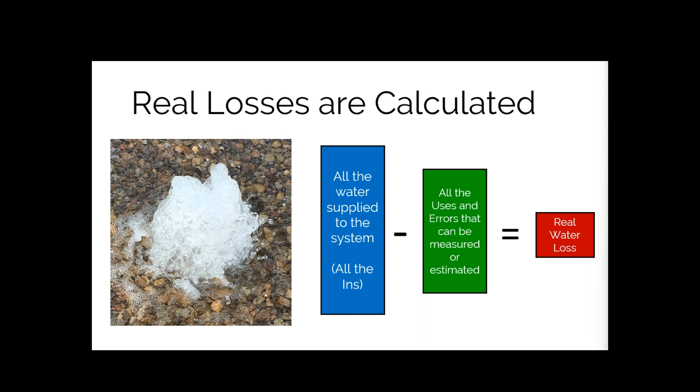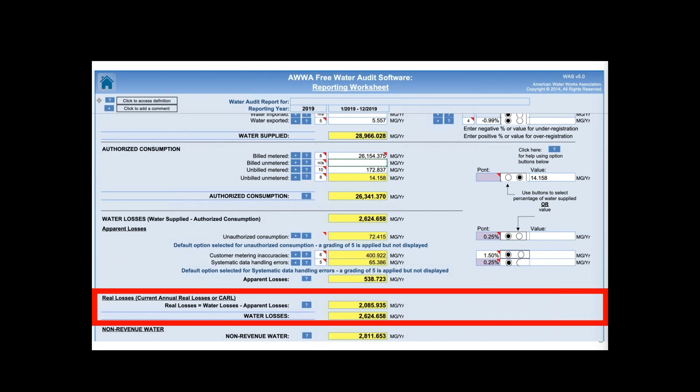When you're in the audit software itself, the real losses are calculated at the bottom of the reporting worksheet. Let's take a look at what the water audit does tell you about real loss. If we go back and look at that water balance again, the real loss is the outcome of that whole balance. It's that calculation based on your inputs for all of those other boxes.

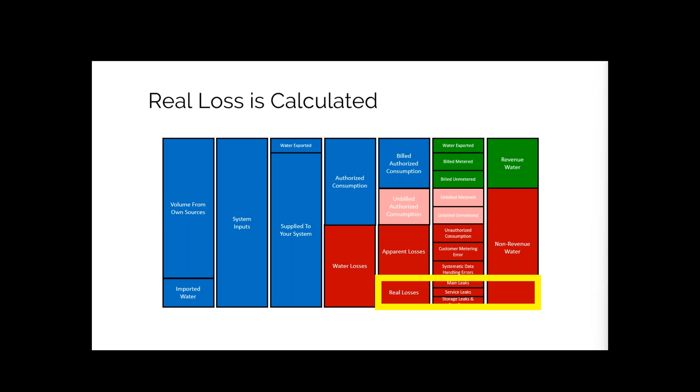Since that value is calculated, you don't enter a validity score for real loss, but every other input does affect the validity of this number. So how does that actually affect it? Let's take a look. If any of your inputs isn't perfectly accurate, the errors are going to show up in the real loss numbers.

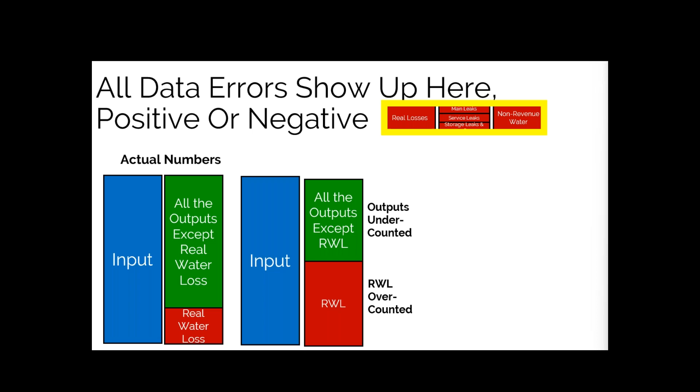For example, if you undercounted your inputs, your volume from own sources or water imported, then your real losses will be undercounted. On the other hand, if you overcounted your inputs, your real losses will also be overcounted. Then if your outputs, like authorized consumption and apparent losses, are undercounted, your real losses will be overcounted. Or if those outputs are overcounted, your real losses will be undercounted.

If you have errors in your inputs and your outputs, your real loss is going to reflect those errors, and it could be going up with one error and down with another error.

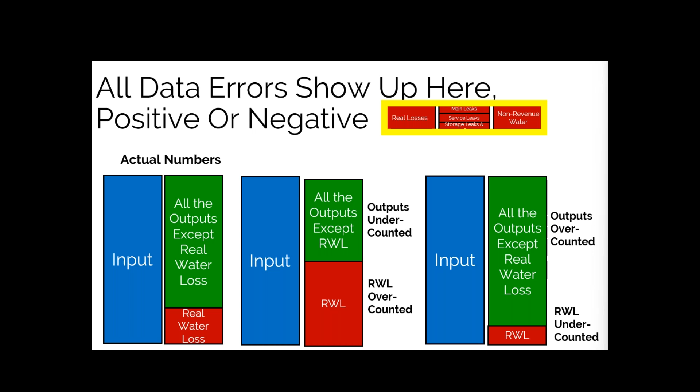So the number reported in the audit is only as valid as the data that you enter. This is why you should look at your data and assess its validity so you understand what the right next steps are for your system. The Southwest EFC is also happy to help assess your data validity and make recommendations on how you can improve it over time. When you complete your audit, you can take a look at your water balance within the software.

You'll note that the water balance states that the real losses are not broken down beyond the real loss volume, so you have to decide what you're going to do with that number. If you're using default values for apparent losses, that means your real losses are based on some assumptions for apparent loss. This free audit software wasn't meant to give you extremely specific numbers.

It is one tool that you can use in the toolbox, but you have other tools in the toolbox that you can also use. We're going to look at the breakdown of real losses and what those other tools are as we go on today.

We also wanted to point out, as you might recall from the last webinar when we discussed apparent losses, that real losses are valued at the variable production cost, while apparent losses are valued at the customer retail cost, unless you choose to select to value your real losses at the customer retail cost. So when the two are valued differently, there can be real differences between the volumes of losses and their corresponding values.

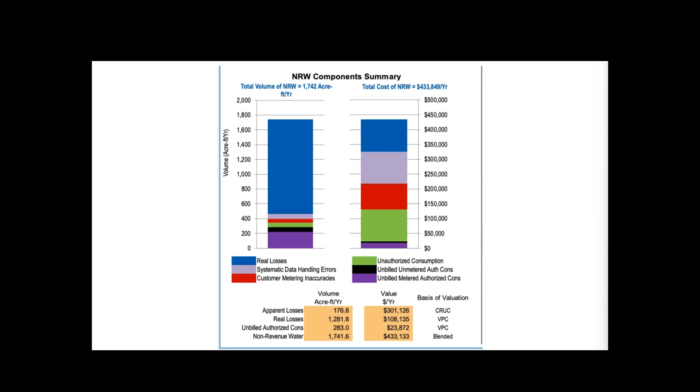And of course, in version 6, they put the comparison side by side. So you can see here in version 6, the real loss volume is on the left, and the corresponding real loss value is on the right. You can see that the difference in the valuations can be significant.

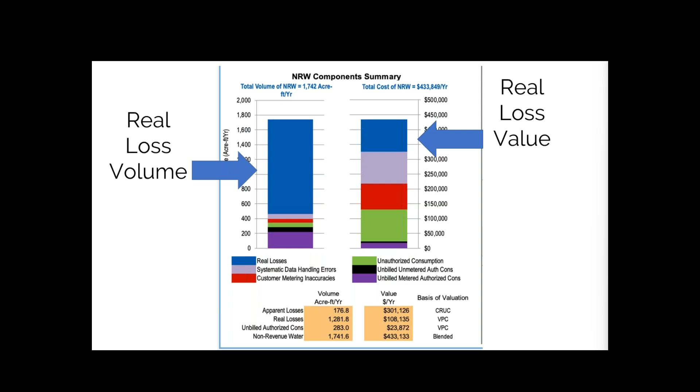So for example, in this particular example here, the theft volume on the left is part of your apparent loss component, and it's almost insignificant here when compared to the volume of real loss. But because it's valued differently, at the retail cost, it has a relatively small volume, but the value is almost equal to the real losses in this system. We really want you to think about not just the volumes, but the values, the dollar amounts associated with them.

And how are you valuing those? Are you selecting to value real loss at customer retail prices? Or are you selecting to keep them at the variable production costs? There are reasons for both, and we would like to have a conversation with you if you're not sure how you should value them, and maybe talk about which audience you're presenting them to.

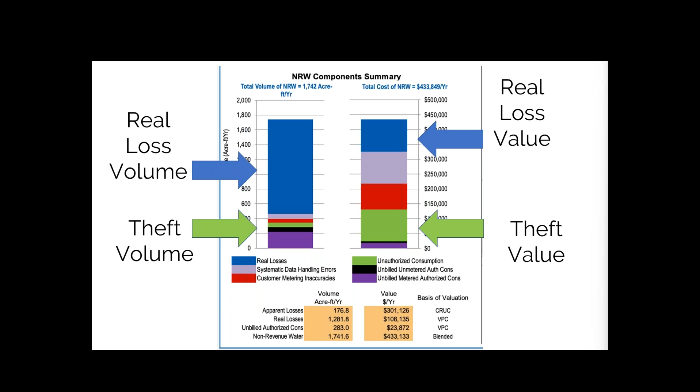So there are different times when it might be appropriate to use the different values. If you've got questions about that and would like to talk to us about it, we'd love to talk to you about it. It's a good question, and it's a good thing to ponder and to think about who you're sharing the information with and how you should be using it.

So we've mentioned that real losses are those leaks in your system. Let's talk about those a bit more in depth now. The first category of real loss is breaks on your mains and transmission lines.

Some number of main breaks are basically unavoidable. The catastrophic main breaks are often the most spectacular sources of loss, and often have the biggest impact on your customers because of the significant effort required for repair and the fact that you're often dealing with large quantities of water.

But not everything surfaces. We do have small main leaks, and they can be particularly difficult to find and deal with, if you have a low density system, or if your sources are far away, or soil conditions prevent those leaks from surfacing. Hydrant leaks and valve leaks are also going to generally fall into this category, even though they're really appurtenances, not the mains themselves.

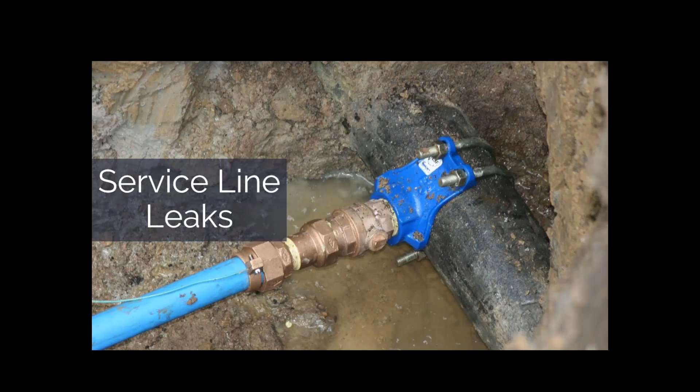And then finally, the service line leaks. These are often less obvious, but it's important to remember that any leak on your side of the meter is going to accrue to the utility as a loss, as a real loss.

The leaks after the meter could potentially accrue to your utility if you have a leak or repair rebate program in place. If your utility credits customers for leaks on the other side of the meter after a repair is made, completing the monetary credit transforms that water from revenue water to non-revenue water, and pushes that volume into the real loss column. So just be aware, if you have a program that helps your customers, it does impact your water audit and how you're tracking those things.

And then, of course, there are leaks at tanks and overflows at tanks. The overflows might be very obvious, assuming they're happening when someone's there and can see them. But there are times when they might not be.

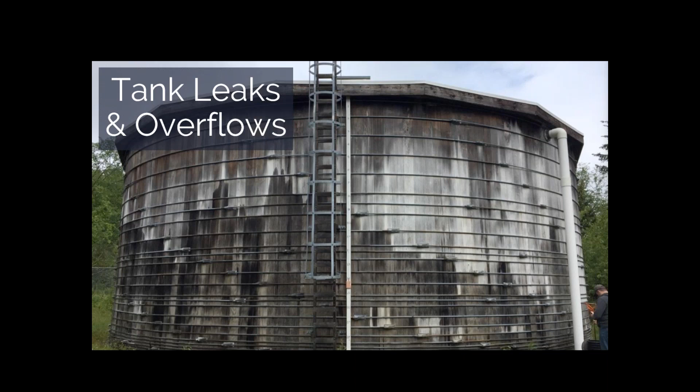This is a water tank in Alaska, and they can no longer fill it to its 19-foot capacity, because if they go over 16 feet, the system hydraulics cause an overflow at a tank about a mile away. It's completely out of sight when you're at this tank, but it's at a slightly lower elevation. So if they fill this tank up, the water flows out the top of the other tank a mile away. If they weren't aware of that, if they didn't understand their hydraulics, and were standing here looking at this tank, there would be nothing going on. They'd be filling it up and wondering why they could never keep it full. So just something to be aware of.

So what we are getting at here is we want you to think about your infrastructure, think about your tanks. Some tanks are built to channel leakage so that it can be recognized, quantified and addressed, and others aren't. Your ability to determine whether tanks are leaking, and how much, is going to be dependent on your infrastructure and the level of effort and what kind of instrumentation you have. If the leak is visible, or if it's soaking into the ground very quickly, lots of things can impact your knowledge of what's happening at the tanks.

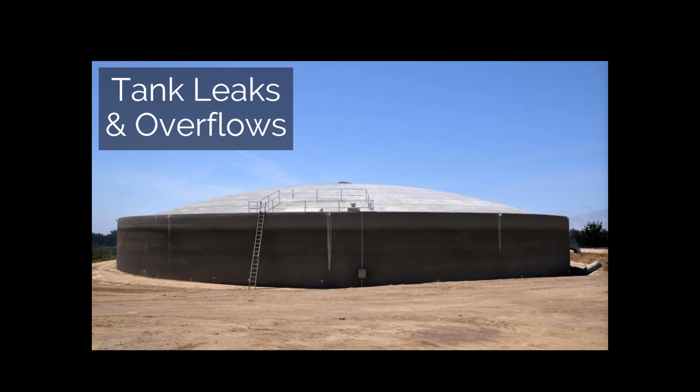You might have real loss in your production and treatment processes as well, if those are inside of your audit boundaries. These losses aren't typically talked about too much because they're usually pretty small compared to other categories. I want to be clear this does not include water that's purposefully used or disposed of as part of the treatment process. Things like well flushing, that's not loss. Neither is brine disposal if you have an RO treatment plant. Those are both purposeful actions. You're doing it for a reason, and those volumes would be considered authorized unbilled use.

But you could have leaks and real loss between the wells and the distribution system. If the audit starts after treatment, these kinds of leaks wouldn't be included. But of course, you want to be aware of them, tracking them, analyzing them, and probably repairing them at some point. It's not one of the major categories, but definitely an opportunity for real loss.

So with that quick review, let's run a poll to see which of the 4 categories I talked about you think typically contributes the biggest component of real water loss—your mains, your service lines, your tanks, or production and treatment losses. I'll give you just a few minutes, and remember, if you want CEUs, make sure you click in.

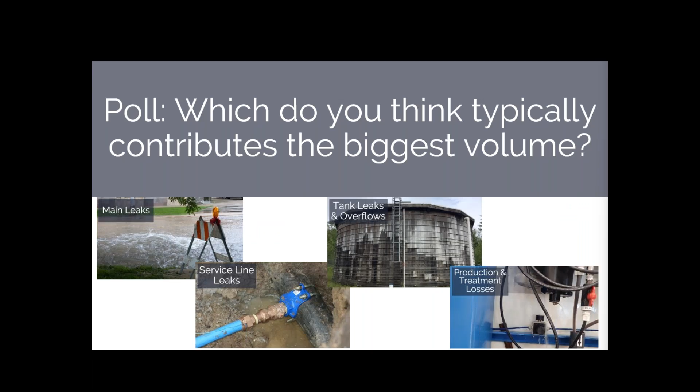All right, so let's get to the correct answer for the question. To some people's surprise, the correct answer is service line leaks. To quote AWWA's M36 manual: in well-run systems, the greatest annual volume of real losses occurs from long-running, small to medium-sized leaks on customer service connections, except at very low densities of service connections. Oddly, these are the leaks that quite often aren't actually tracked closely in many water systems. They're often found and repaired, but poorly documented. This is something to think about when considering your data, the sources of loss, and what you want to track going forward.

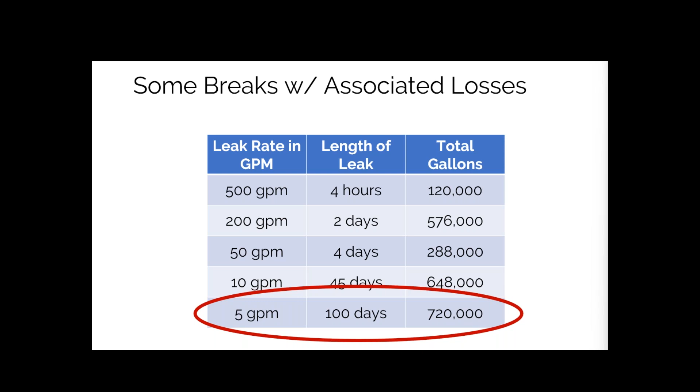Getting back to my earlier point about long-running small leaks, here's a chart of loss volumes based on flow and runtime. One thing this really brings home is that the gushers quite often aren't the problem when it comes to real loss volume. That's because they're big, so they tend to be noticed, located, and repaired quickly. The small, long-running leaks can lose more water than the big ones over time.

There's a lot the audit doesn't tell you about real loss. In fact, it only tells you one thing: the magnitude. And if you don't have the rest of the audit dialed in, it's a little like looking at an iceberg. You've got an idea of how big it is, but you can't really tell for sure without looking under the water. The devil's really in the details.

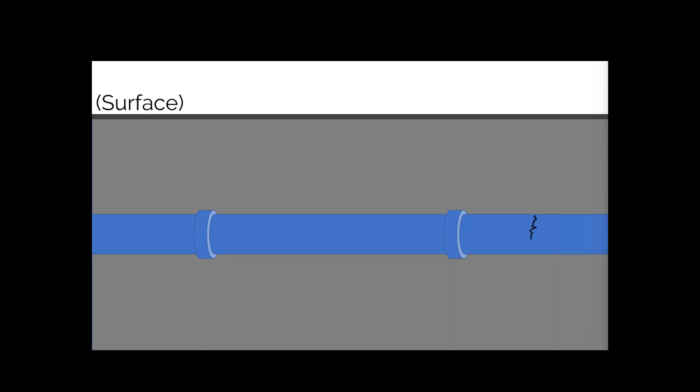Here in particular, we're talking about the types of real loss that typically occur on the mains. If we take a look, there are really 3 basic types of leaks. Many leaks will surface and effectively announce themselves—those are your reported leaks. As a side note, the next question to answer for these types of leaks would be who reported it: the public or utility staff doing rounds. This is a good piece of information to keep track of as well.

Second, we have leaks that don't surface, but are findable through proactive leak detection possibly. These are called unreported or hidden leaks. They're big enough to find if you're looking for them and might over time turn into reported leaks. But they aren't obvious and so may run for longer periods of time without being discovered. And finally, there's what we call weeps and seeps—these are the undetectable or background losses.

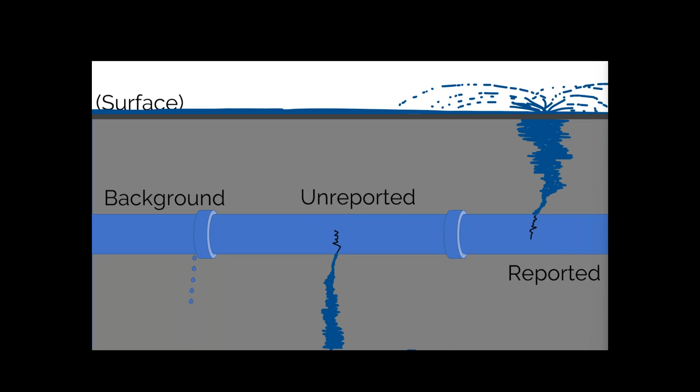They're named this way because they're happening in the background and often can't be found, even if you're actively looking for them using typical leak detection equipment. These are the small leaks, typically at the joints, that are basically unfindable. They're not reported, they're not detected using traditional acoustic equipment. And I did say traditional.

There are new technologies coming out all the time, and it's possible that over time these categories are going to blend together even more. If we're thinking about the satellite technology that's looking for chemical signatures of water or temperature differentials, these things might start to show up with those types of technologies.

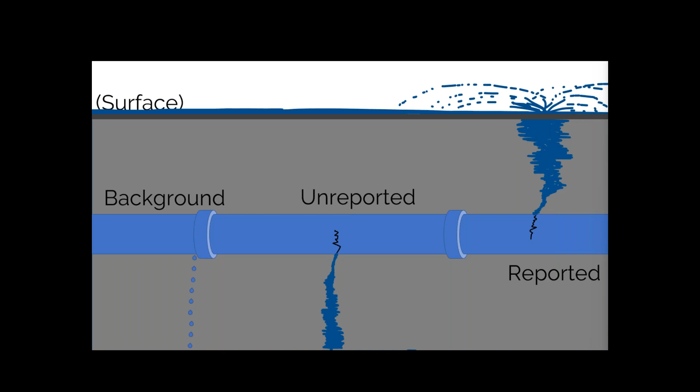This might be because the utility knew there was a leak and they were letting it run as an experiment, or it could be that this was a random search and the events around June tipped them off that there was a leak that they didn't get around to fixing until August.

But this points to a major difficulty with quantifying real loss. And that is that even if you can find the leaks, it's really hard to figure out when a leak started. Further, if you're just starting to analyze your system, you may not know what the actual no leak baseline looks like.

So it's possible that this correlator was randomly placed and no one realized there was an issue until that first spike in June. And only after that repair was it obvious that the pipe had been leaking when the correlator was first placed. So this is the reason for night flow analysis and other methods that we can use.

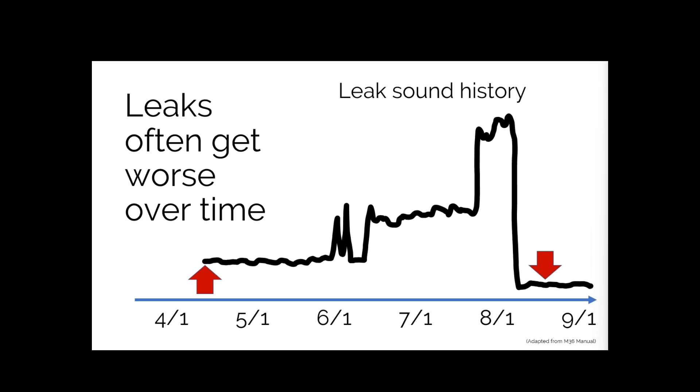So every leak has 3 time periods during its lifespan. The first is awareness, or how long it takes the utility to become aware that there's actually a leak. In the case of catastrophic breaks, that time might be short, but it might not.

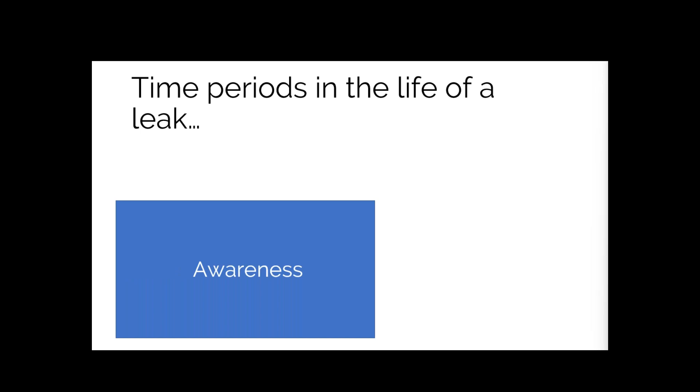Next is location, the time it takes to locate a leak. And finally, there's repair, which is really the time it takes to isolate and terminate the leak once it's been located. For real loss purposes, you don't really care how long the repair takes. You want to know when the leak was isolated and turned off or stopped.

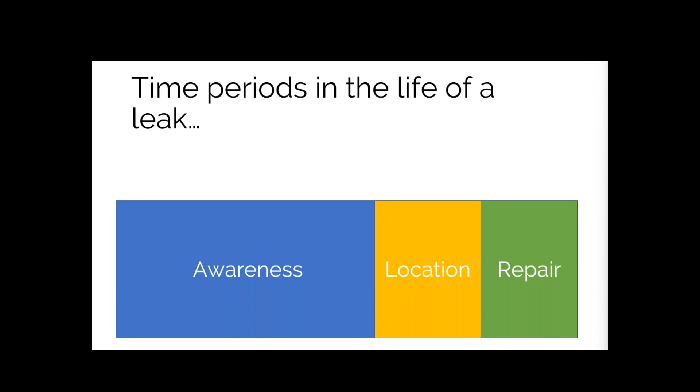How fast you're finding leaks and how fast you're fixing them can have a big impact on your real loss volumes. It's really all about the runtime.

But of course, no matter what you do, you can't stop leaks from happening, and there's going to be a practical limit to real loss intervention. So no matter what, you're going to have some volume of real loss, and it's impossible to recover it all or reduce it all to zero.

Some of that real loss you'll be able to recover, or more appropriately reduce, economically. In other words, you'll get the cost back for recovery or reduction. Some volume you could recover uneconomically. So in other words, you might spend $1 to recover 90 cents of real loss. And although that seems counterintuitive at times, there are reasons why that approach might be taken.

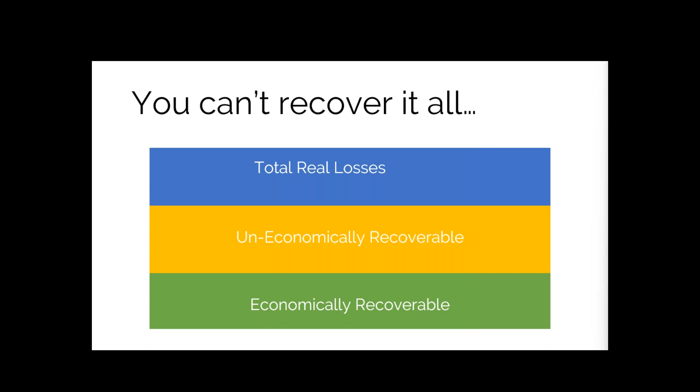For example, if you have a shortfall of supply, or if you're running up against a maximum state loss threshold, you might take some actions that cost you more than they return. And some volume just isn't going to be recoverable at all because nothing is ever perfect.

Pipes are going to break. There are limits to what you can do, but that's okay because you aren't looking for zero loss, which typically is impossible, but instead you're looking for an economically acceptable level of real loss.

There are 4 mechanisms you can use to reduce real loss or keep them economical. These are what I like to call potential areas for action. So these are the activities you can take to start controlling your real loss. And these are pipeline and asset management. So here we're talking about selection, installation, maintenance, renewal, and replacement of your pipes.

Engaging in active leakage control, looking at the speed of your repairs and the quality of your repairs, and pressure management. Using or not using each of these mechanisms will impact your overall real losses.

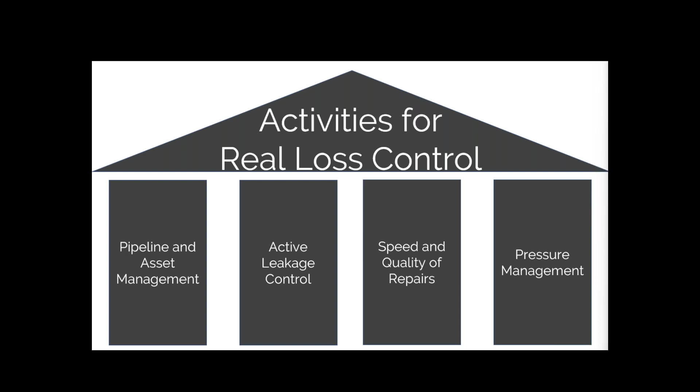But before you start applying these loss reduction techniques and taking action, you have to identify the nature, the quantity, and the cost of your real losses first.

Real loss control isn't free, and in many cases it's not even cheap. So you want to make sure you understand the problem you're having first, and then develop your control strategy. This becomes more important the less accurate your audit input data is.

So for example, if you're using the audit defaults for theft and systematic data handling errors, and maybe your customer meter testing data is incomplete, or you don't have an accurate and complete picture of what's going on with apparent losses, that's going to reflect on the real loss volume the audit calculates.

And this gets back to our opening discussion. The real loss volume the audit calculates is based on all of those other inputs. It's not going to be perfect. What you have is an approximation. How reasonable that approximation is depends entirely on how accurate those other inputs are.

So you don't want to go and take action based on bad data. We don't want you to have bad data and get an incorrect view of what's going on and then apply the wrong loss control tools.

And like apparent losses, you need to tailor the strategy to your system's needs. Real loss control strategies are effective, but they can be labor intensive, they can be expensive, and after a point they can have diminishing returns, particularly if they're misapplied.

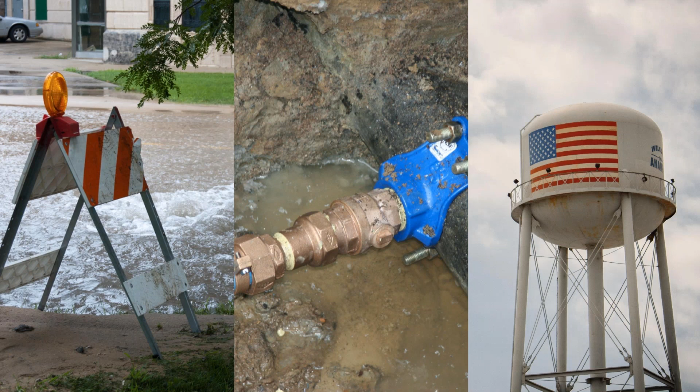As Don mentioned, it's often quite difficult because you don't know when things started, but doing this will give you a better picture. As Don noted, and as we looked at in our poll question earlier, quite often half or more of the real loss comes from service lines. Doing component analysis is the kind of thing that can help you pinpoint that sort of thing.

So if you have data on all three of those categories, or maybe only one or two, you can still start that process and make your real loss picture clear. Because in attempting to do it, it shows you what you know and also what you don't know and aren't tracking. One of the nice things about leakage component analysis is there are guidelines as to what information you should track and what level of detail you should keep on it.

So doing a leakage component analysis, particularly with real loss, serves a couple of related functions. It's corroborating or contradicting your real loss volumes that the audit produces. That in turn gives us insight into the accuracy of the audit, and can help us calibrate it by maybe changing some of those assumptions, as we've said. And it also helps you determine where your real losses are occurring, in general terms, which the audit also doesn't do.

It just gives you that lump sum, because you're doing an analysis of each of those loss areas. And finally, it kind of helps you see what's going on in the background.

As Don indicated, there's three kinds of loss on mains: the reported, the unreported, and the background. Now, the unreported stuff you can find if you're looking for it, but you might not be. So if you can quantify the reported leaks, that gives you a volume that's falling into these other two categories. Basically, it allows you to get more and more granular in your understanding of what's going on.

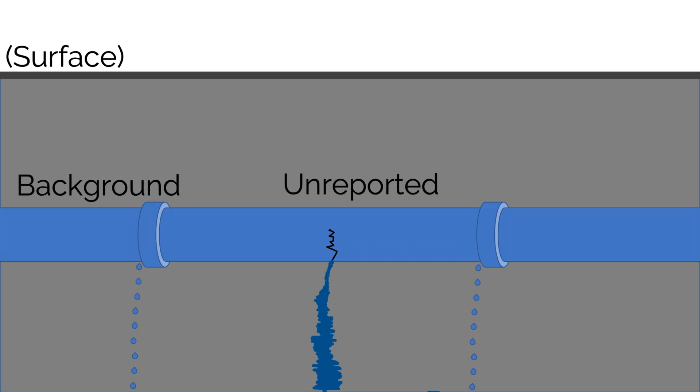As I said, in the context of real loss, we talk about the leakage component analysis. There's actually a tool for this, developed by the Water Research Foundation. It's called Project 4372, and there's a suite of tools, Excel based. Essentially you can take your event data, put it in there, and it will model your losses for you and give you an idea of what's going on in the background, what's likely reported, what's likely unreported.

Trying to do that process is really useful because it shows you really clearly what you aren't tracking. If you have that break and repair time data, you can really start digging into those results and splitting it up into its constituent parts.

It's a fairly complex and data-heavy tool in that you have to have information to put in it, but you can also do some estimating, and it has the ability to model how changing repair times might impact your losses overall, because there's a direct correlation between how long something runs. There's also information in there you can use to estimate volumes based on pipe size and leak size and things like that.

But fundamentally, the biggest eye-opener for people trying this the first time is that it really shows you what you're not tracking and could be.

If you don't have quite that granular data, maybe all you have is a map of your system showing what materials you have and a list of breaks you can identify by material, all is not lost. You can do a more simplified analysis called a break rate index analysis.

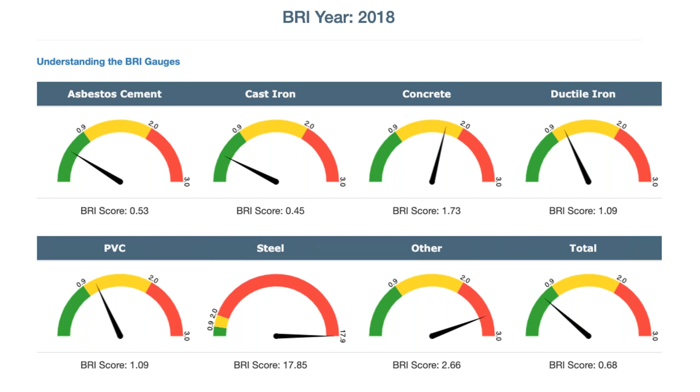All right, about 60% have voted, so we're going to leave it up for about 15 more seconds. Remember to get your answers in. Okay, the poll is closing in 3, 2, 1.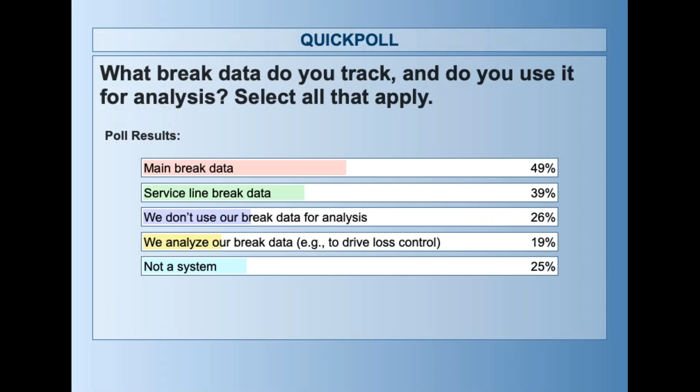So it looks like 49% answered main break data, 39% service line break data, 26% we don't use our break data for analysis, 19% we analyze our break data, and 25% not a system. Okay, that's about typical. That's what we usually see.

For those of you who are tracking main and service line break data and using it for analysis, kudos to you. I think it's really important, not just for water loss control. Honestly, I think that for capital improvement, it's actually much more important because using break data, as I will show you in an example here in a moment, is really useful for figuring out how you're going to repair and replace pipe. For those of you who don't use it for analysis, you might be a really small system and not need to, but I would potentially second guess that question.

A lot of systems kind of don't collect it and use it because they don't have a lot of leaks right now, and that's sort of the justification. I think over time, every system develops more and more leaks, and if you've been collecting information strategically, over time you start to see those patterns develop as opposed to suddenly realizing you have a problem and then not having the information you need to actually address it.

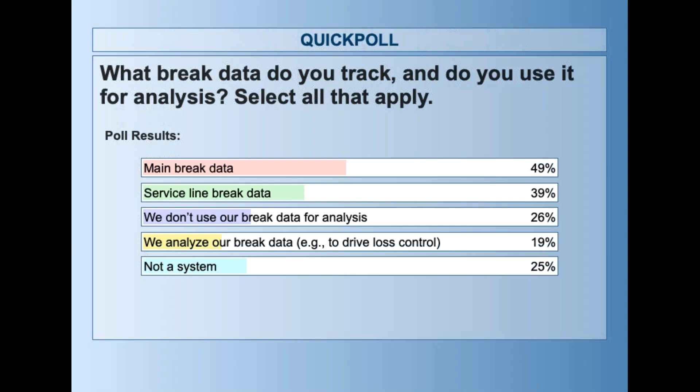So for those of you who aren't collecting it, think about maybe starting it. It's actually a relatively inexpensive and effective way of doing things. Our next session is actually going to be about data collection and mapping, so please tune in and maybe I can convince you to join the data collection side of things.

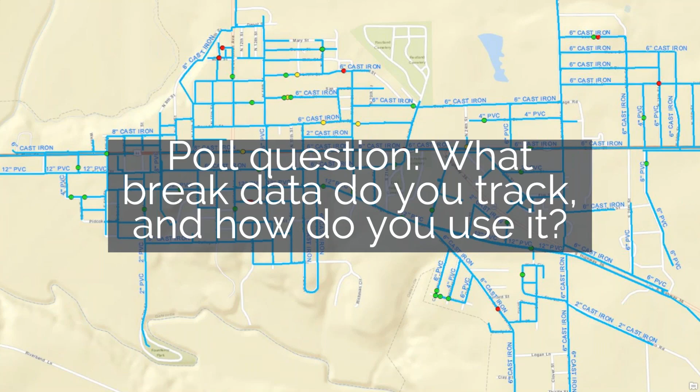All right, so we've talked a little bit about component analysis and those sorts of things. I want to move on to actually doing something about it, reducing real loss and what kind of tools you can apply. We sort of call all of the possible things you can do the loss toolbox, and in this case we're talking about the real loss toolbox.

As Don mentioned, there's sort of 4 different categories or 4 pillars of loss control activities: asset management, active leakage control, repair speed, and pressure management. But obviously within these categories there are a lot of different things you can do, and this is not a comprehensive list. Under asset management, collecting and analyzing break data, hint hint, is one of the things you can do. But main replacement and repair techniques, and service line replacement and tank management fall sort of into this category.

Under the active leakage control, there's different kinds of proactive leakage control that you can do: acoustic surveys, satellite surveys, also night flow analysis, sort of figuring out what that baseline leakage level probably is. Speed and quality of repairs is fairly self-explanatory, whether you could or should improve either the speed or the quality or both of the repairs that you're doing.

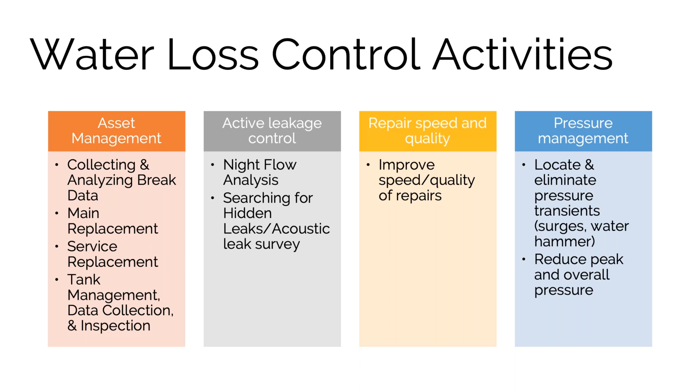And then pressure management kind of falls into two broad categories. There's dealing with overall peak pressure and overall system pressure, and then also locating and eliminating pressure transients. So those surges from water hammer, like when pumps slam on and off, or when valves are open and closed rapidly, being able to track those in your system and reduce them. These and other activities, as we said, sort of fall into this thing we call the real loss toolbox. There's a copy of this along with other tools that you can use for other kinds of loss attached to our applied activity today.

On the left-hand side, we've got the kind of loss it applies to. In the middle, we've got the type of activity. And on the right-hand side, we've got a broad estimate of cost.

Collecting and analyzing break data is a relatively cheap thing to do. Doing a night flow analysis is a little bit more expensive. And of course, replacing mains is a very high cost option. So there's a lot of different tools here.

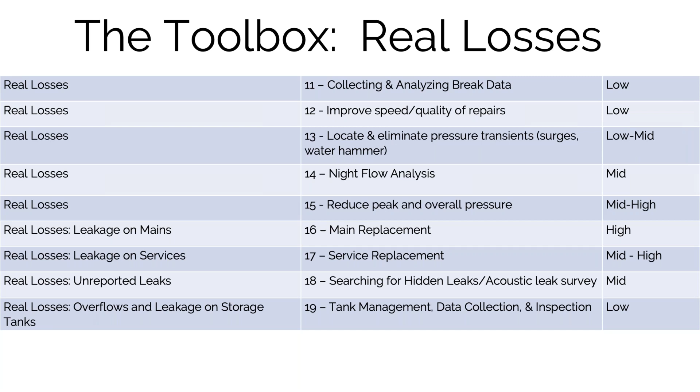I'm going to walk through an example for each of our 4 pillars and show you how these have been applied in real life. I'm going to start with asset management, and I'll do these in a slightly different order since it makes more sense here. Collecting and analyzing break data, then using that to drive main replacement, is really important. This is the asset management tool.

You've probably heard of asset management. It's essentially an overall approach to managing utilities, or any other business for that matter, where you're trying to make data-informed decisions to figure out what to do, how to do it, and how to get the most cost-effective, efficient results for your utility.

We really think of water loss control as a subset of asset management, and water loss control activities can become part of your asset management plan. Many things in your asset management plan will have co-benefits as they relate to water loss control, as we will see with this perfect example here.

Asset management used to be thought of as a big utility thing. We and a lot of other providers have shown again and again that small systems are really well equipped to do this kind of thing themselves as well.

This example also shows you that you don't necessarily have to use the water audit as a starting point for activities that will have positive impacts on water loss control. Although doing the audit is really recommended because that helps you keep track of the efficacy of what you're doing.

So the background for our example here: we've got a system, it's our home system actually. Albuquerque had been spending about $5 million a year for pipe replacement, and they were having no impact on their annual break rates or water loss volumes.

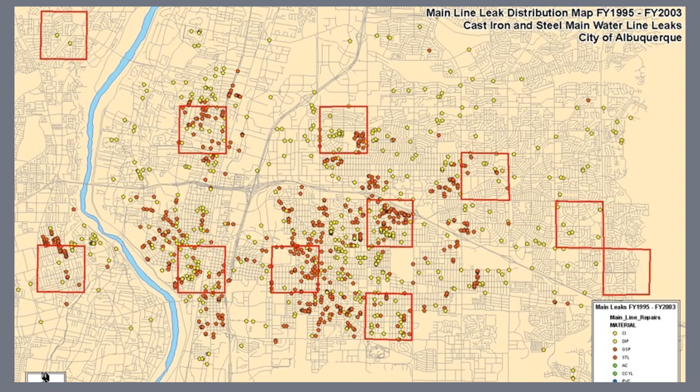Overall in the system, steel only accounts for about 5% of the system, but half of the breaks in this system were occurring on that 5% of the pipe. Now we start to see the issue: steel pipe breaking at 10 times the rate that the cast iron pipe was, even though the cast iron pipe was significantly older.

This is actually the kind of issue that the BRI tool I showed you, the break rate index, was designed to highlight without having to do an in-depth mapping process. This utility was actually the inspiration for that tool.

Knowing that they've got a big problem on a small part of the system, the utility was able to change how they manage pipe replacement by focusing on the steel pipe, and not just steel pipe, but using that break data to figure out what steel pipe was bad and what steel pipe was worse, because even among the sections of steel pipe, there were still some sections that were in serviceable condition.

So they took this information, rethought how they were doing things, and developed an asset management plan that changed the strategy for pipe replacement.

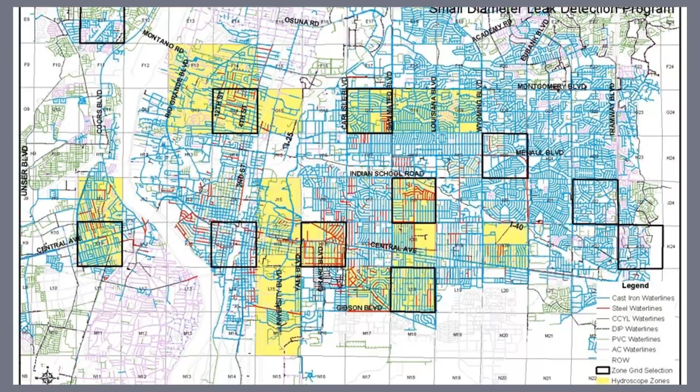Basically, they started doing targeted pipe replacement based on some real data rather than just looking at the oldest pipe in the system and going with that.

They implemented this asset management system around 2011, and within 5 years they'd reduced their break rate and associated costs by 45%, which is pretty dramatic.

They also had a 5-year cost avoidance of about $9 million, and that's $9 million that they were able to spend doing other things, valve replacement programs, other kinds of activities.

And the interesting thing about this process is they did not change the amount of money they were spending on pipe replacement. They're still spending $5 million a year. They actually replaced less pipe in the system because they were doing these targeted approaches. So they had more initial setup and breakdown costs as they were moving around the system, but it was a much more effective way of dealing with the pipe breaks, as the results here clearly show.

I don't have the loss control numbers, but there was a concurrent drop in overall real losses as well that sort of tracked this. So, good example, I think.

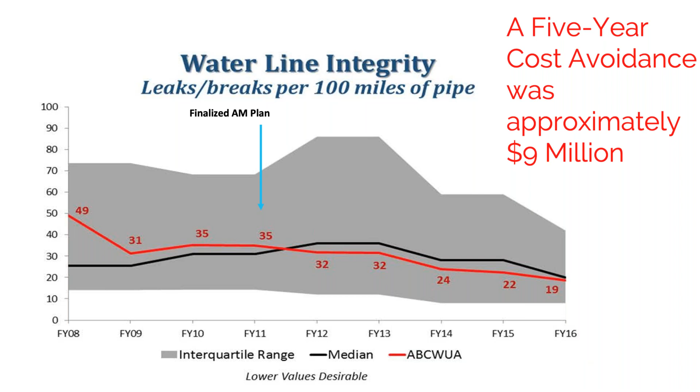Moving on to speed and quality of repairs, it seems pretty obvious. It's pretty straightforward if you track this information, but a surprising number of systems that we work with cannot tell us how much they spend on an average service line or main break, or how long those repairs take, because they just don't track the information because they don't see it as being valuable.

And I'm not talking here about just speeding up your repairs for the sake of speeding it up. You want to do it if it makes sense, when it's evaluated, given the triple bottom line and the costs associated with the water that you're losing.

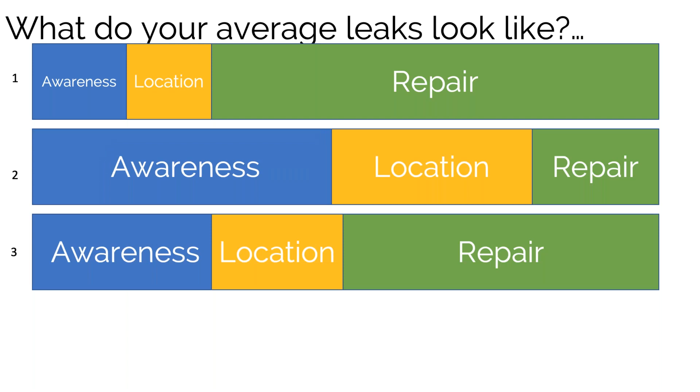So this is kind of a thought exercise. Just think about what the average leak in your system looks like. Are they typically those gushers where you become aware of them quickly, but maybe it takes you longer to repair? Is it maybe something a little more like this, where awareness takes more time? There's a lot of different ways this can play out, and obviously different leaks are going to play out differently.

But knowing what the average in your system is, is really useful, because then you can start to look at what would be the impact of speeding up the repair. If I can cut my repair time in half, what does that save me in terms of losses, et cetera?

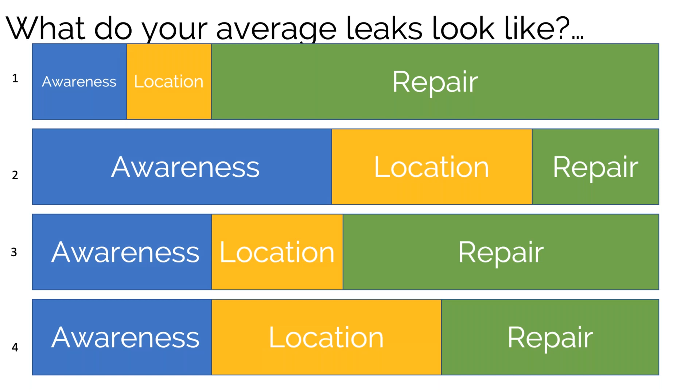You really have to do a cost benefit analysis to see whether there is a case for more rapid response. Some costs you might have are having additional staff on call to be able to deal with stuff at night, maybe additional equipment or resources or spare parts that you don't normally stock.

And then you have to weigh that against the benefits of actually speeding things up. Reduced water loss would be a benefit, and obviously not having to produce the water that you're just pumping out of the hole in the pipe. Maybe reduction in damages from catastrophic failures, letting things run longer so there's more damage. But then there's also social benefits, customer goodwill, and there may be other non-economic benefits.

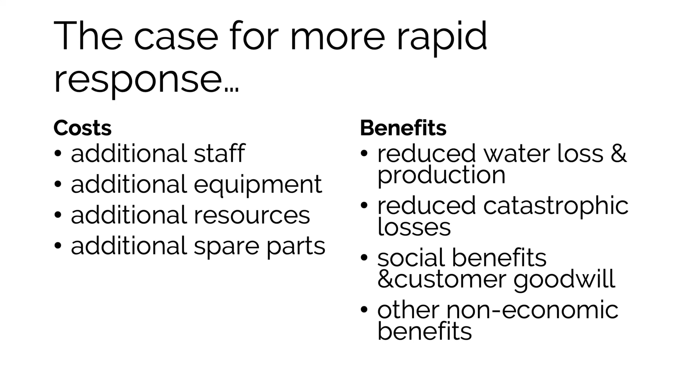So this is really about a cost benefit analysis. And the neat thing about data collection is you can leverage break data along a lot of different lines if you collect the right pieces of info.

This map you're looking at here is from a system we worked with in Texas, and we started out looking at this as an asset management program, but one of the things they tracked was repair speed. So in addition to tracking the location of breaks and the materials breaks were on, we added a time element to this. You notice there's 3 different colors of dots: green, yellow, and red.

Green was repaired within 24 hours, yellow within 48, and red's anything that took longer than that. So 80% of the leaks were repaired within 48 hours, 70% of those within 24 hours. Some of the other breaks, about 18%, took longer than 48 hours.

And then we started noticing there's some correlations in a few places between long repairs and areas that are having repeated breaks. But because we had this information and knew how many people were involved, what the labor costs were, we could start to do that analysis to see whether sticking to the current repair scheme was cost effective, or whether it might be more cost effective to speed it up or slow down.

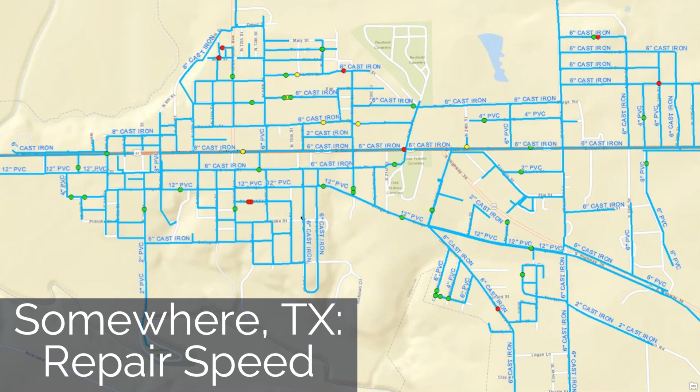So when you're thinking about this aspect of loss control, you really want to think: do you know how fast you're fixing breaks? Can it be improved? If so, how can it be improved? And then finally, the real question is, should it be improved? Because in some cases it's going to make sense, and in others it's not.

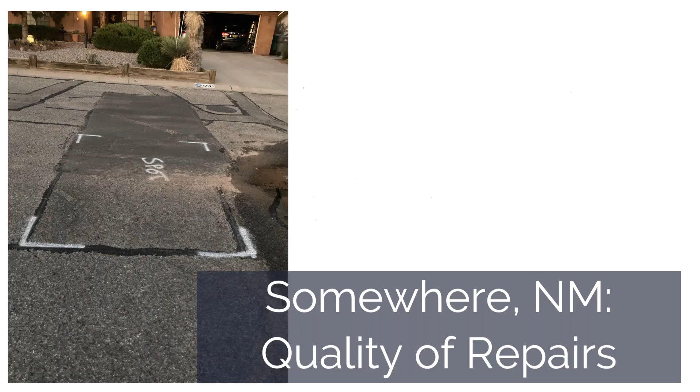But that's only half the picture. That's the speed. Quality is the other side.

This is a leak actually in our director Heather's neighborhood. There have been 5 leaks in the same location over the past 6 to 9 months, and the utility just keeps digging up the street, making a repair and repaving it. And if you look at this picture, you might notice there's a spot right on top of a recently repaired section of pipe, because it's leaking again.

And this has been going on for a long time. We can tell because on the upstream, uphill side of these leaks, it's dry as you'd expect out here in the desert, whereas the downhill side is all lush.

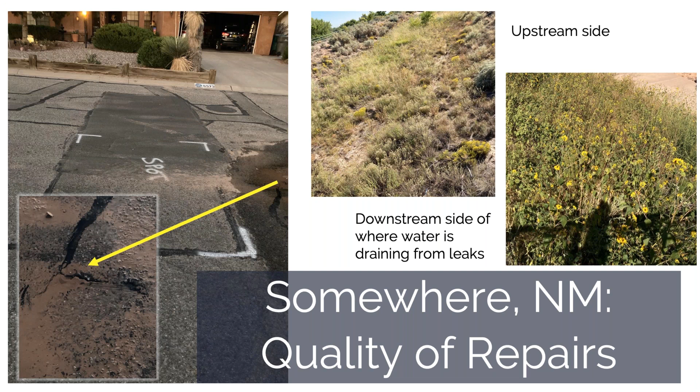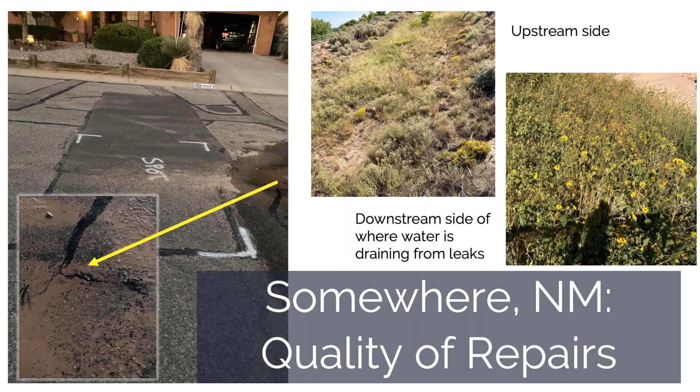So this gets into the repair approach. Is this utility doing the right thing by continually coming back to the same place? If this was an occasional issue, that would be one thing, but this is actually more the norm in this particular town. It took them 7 days to repair this, so maybe there's a speed issue as well.

But here the fundamental question is, was repair actually the right solution? This area is known to have substandard pipe. It's old polybutylene stuff that was installed when these developments were made, and this kind of break pattern happens all over the town.

It might make more sense in their case to replace pipe as soon as they notice a break, because the typical pattern is you have one break, you repair it, and then you're going to have to come back time and time again.

So if you're tracking this kind of information and are aware of it, you can start to do cost benefit analysis. It might cost a little bit more up front to yank a service line out and replace it with something that's actually going to last on that first service call, but by doing that you avoid all those return calls. Again, if you've got the information, you can do the cost benefit analysis and see whether that makes sense. So speed is one piece, quality is another.

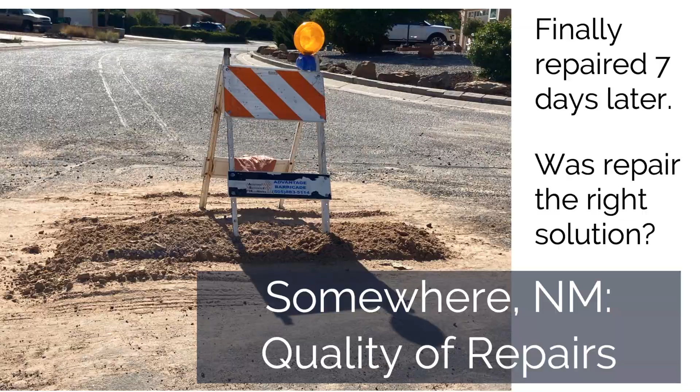Moving on to pressure management. This, like asset management, is one of those tools you can use in the absence of any other information, because we know there's a direct relationship between pressure and leakage.

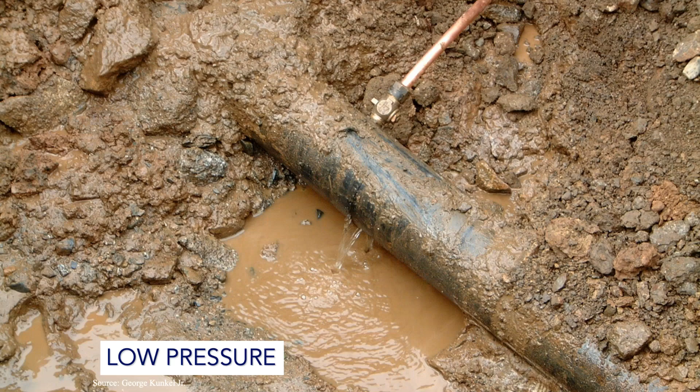If you've got holes in your system, the lower the pressure, the lower the losses will be. The same leak at low pressure might dribble, whereas as you start to jack the pressure up, it starts to gush. This is a pretty linear relationship, and we can use that knowledge to impact losses in our system by thinking about optimizing system pressure.

Version 5 of the audit actually has a KPI where they look at losses per pound of pressure, because in the typical pressures that utilities work in, there's a more or less linear relationship between loss and pressure.

So you can use this kind of information to see what the likely impact is going to be. It's obviously not going to be perfect, but it's good enough for planning purposes.

There's a water loss benefit to reducing pressure, assuming reducing pressure is a viable option for your system. If you're running at 35 PSI, you probably don't have anywhere to go. But if you're a high pressure system, there might be areas within your system where you could reduce the overall system pressure by using a PRV to reduce the pressure and the associated loss.

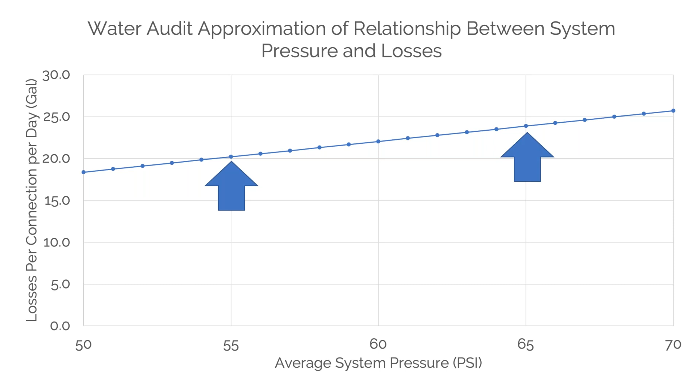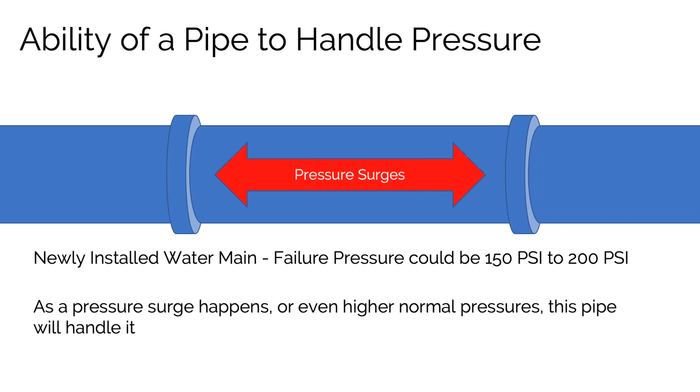But there's another aspect of pressure reduction that is really helpful, and that has to do with finding those transients and getting rid of them. Because when a pipe gets put in, it might have a very, very high failure pressure, you know, 150, 200 PSI, but for every pipe, over time, pressure surges are going to happen. When it's new, the pipe can handle it, it's not a problem.

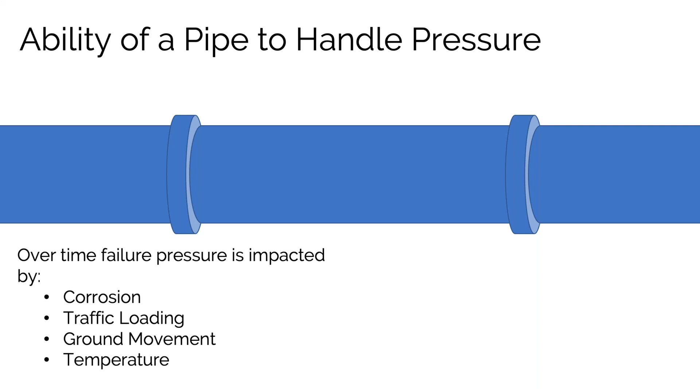Over time, that failure pressure threshold is going to be impacted by things like corrosion if it's metallic pipe, traffic loading, ground movement, or temperature swings. All of these impact your pipe over its life and reduce its ability to handle pressure surges. And if you keep having them, and your pressure threshold is dropping over time, eventually you're going to start to have breaks.

After a couple of decades in the ground, that 150 PSI might be dropped down to 100 or less. So think about not only overall system pressure, but pressure in specific areas, and the ability of your pipe to handle pressure surges.

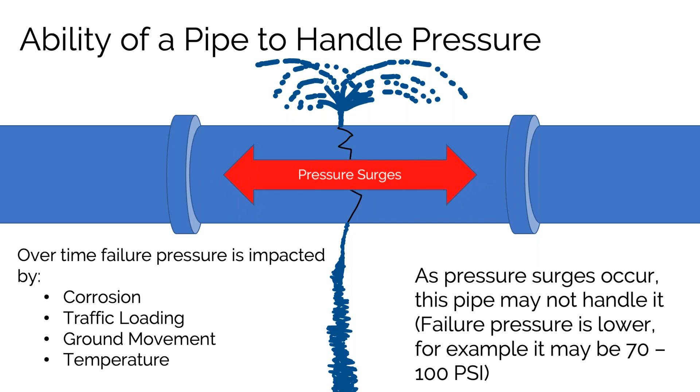This is a piece of break data that often isn't captured - what the pressure is at a particular location where the break happens. Because if you're collecting that information, and you should be able to find it out if you have a hydraulic model, you can start to track and see whether there's a correlation between pressure and breaks. And if it's possible to keep the overall system pressure below that or eliminate those transients, you might be able to reduce the number of breaks in your system.

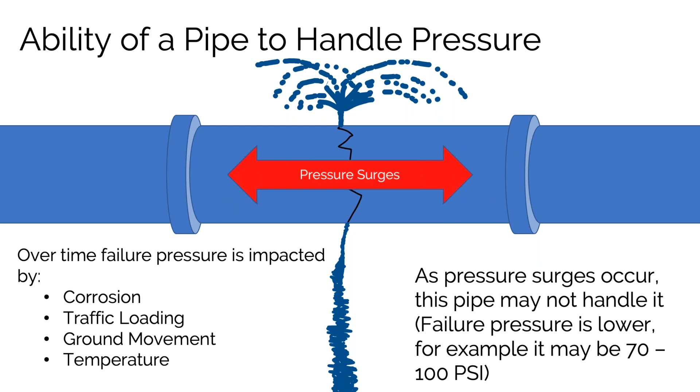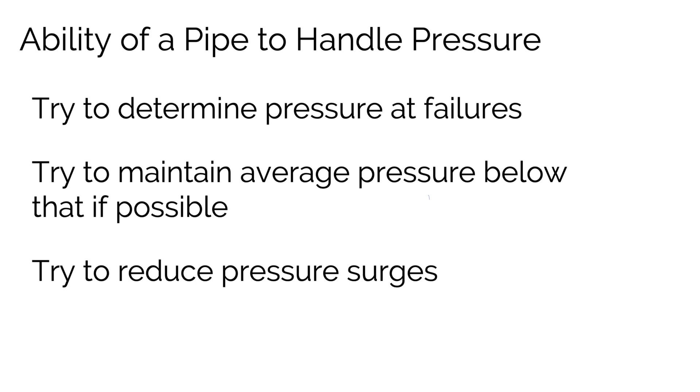So when you're thinking about pressure in your system, think about optimizing it overall, trying to determine pressure at failures, seeing whether it's possible to maintain your system pressure below that threshold. Obviously try to reduce those pressure surges if you can, because if you don't deal with pressure over time, just like everything else, break rates are going to go up.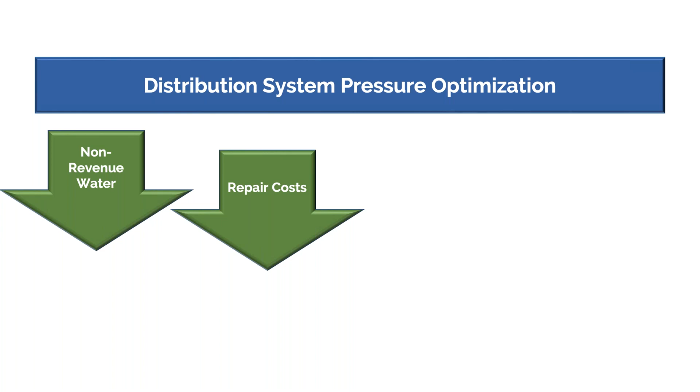And the neat thing about pressure optimization is there's a whole lot of co-benefits that go with it. If you can do this, there's going to be a direct impact on your non-revenue water - it will go down. But if reducing pressure reduces breaks, then you've got lower repair costs. If you're reducing pressure, you're going to lower your energy costs because you're not pumping at as high a pressure. And possibly the biggest benefit is that deferred asset replacement possibility.

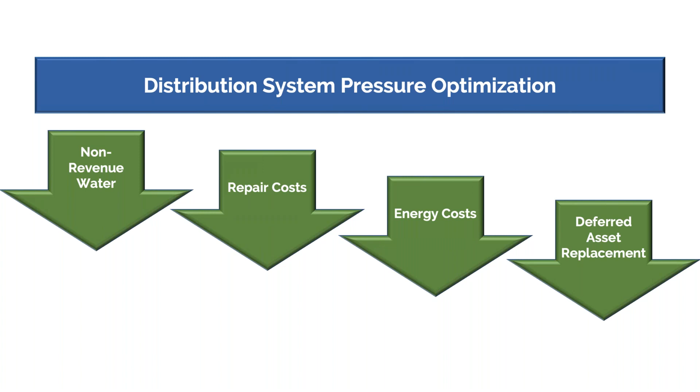If you're babying your pipes, keeping track of what's making them break and dropping your pressure values down below that, you have the potential to help defer asset replacement, and that's money you don't have to lay out. So think about your pressure in your system, think about whether you're optimizing it, because even a small reduction should help. But recognize that in some cases you might not be able to, just because of your particular system.

Last but not least, we're going to look at active leakage control, which is - fine. Yep, just a time check. I think maybe we should just go ahead and move to the wrap up. Okay.

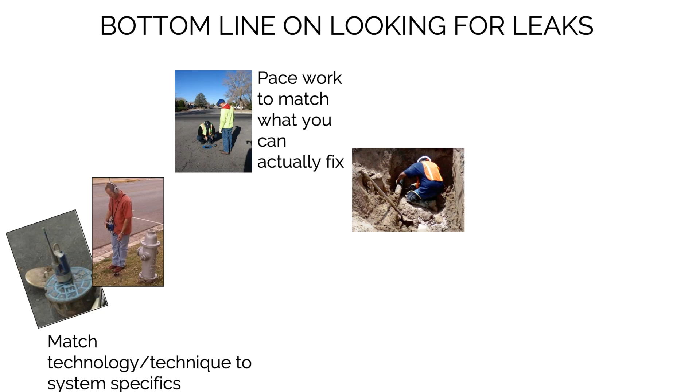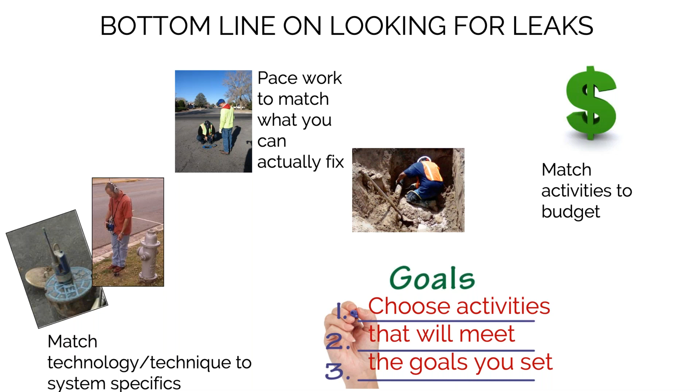So when you're thinking about leaks, just think about a couple of things. It's not so much whether you should do it or could do it, but pace your leak detection to what you can actually fix. Try to match the technology to your system specifics. Make sure that your leak detection practices and goals are aligned, and match what you can do to your budget. Think about whether you're tracking your leak detection efforts, optimizing them as well, and think about whether you can change your strategy to make it more efficient, because leak detecting your entire system every couple of years might be an effective way to do it, but kind of like with our break analysis, doing pinpointed leak detection is often a much more cost-effective approach.

Those tools and information about those and a lot of others are available on our website. We've got a whole water loss control switchboard that you can look at. That's available at our website at SWEFC. And one of the things on there is a template guidance document designed for documenting your auditing process.

And we're going to give you an applied activity that you can download from the chat here. That is essentially a bit of a thought piece - a team exercise on reviewing the real loss volumes and values that your audit gives you, making those initial assessments about whether loss control action is appropriate, and if so, what action you can take and maybe should take. So with that, I will open the floor to questions if we have any, and put up our contact information for anybody that wants to talk about any of these issues in much more depth.

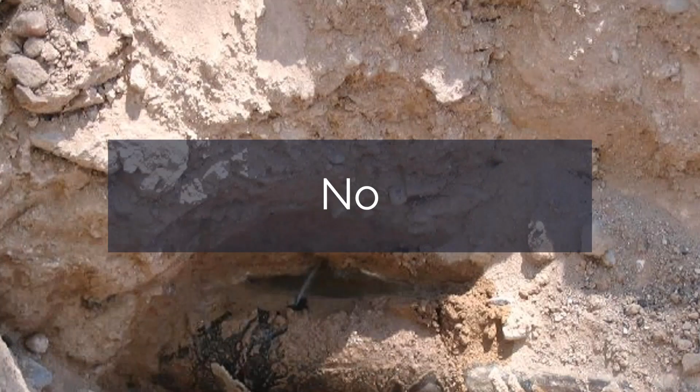We have a question about surveying the entire system every 4 years. I'll go back to that slide and walk through that section. The point is that not every leak is going to surface, and not every leak can necessarily be found. Like this example right here, it's been going on for a very long time and it's bone dry above it—this is a leak that's not going to surface.

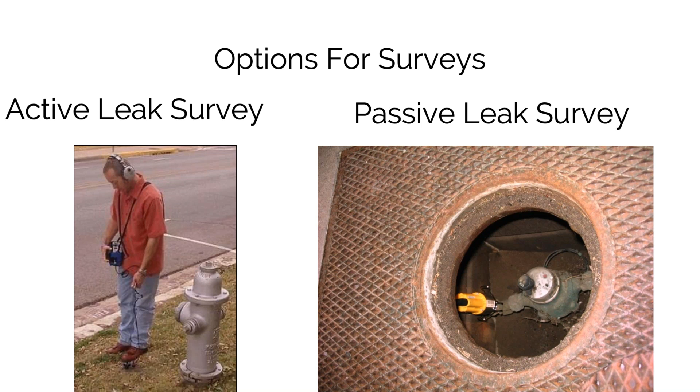There are a lot of different options for doing surveys, and my point today wasn't to go over the types of leak detection you can do, but to have you think about strategizing how you do your leak detection. We worked with a system that, as a standard operating procedure, did leak detection on a quarter of their distribution pipe every year, working around the system like clockwork, doing the same section every 4 years.

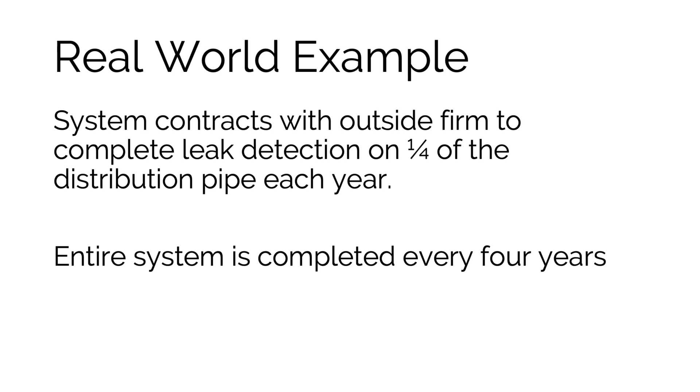Doing that isn't necessarily bad. The issue was that they weren't necessarily analyzing the data they were getting from it. The pros of doing that is they had a really good understanding of their system and how it was changing over time, and they put that information into GIS so they could track where the breaks were going. The problem is they didn't do the next step, and they also had some financial issues—so they were finding leaks, but not necessarily repairing them. They would leak detect a section, find some leaks, go back, repair them, but then they wouldn't do a secondary sweep.

One of the things we know is that small leaks are really loud. They can often mask larger leaks that are happening somewhere in the area. So they were finding a lot of small leaks, but they weren't necessarily going back and checking their homework afterward to see whether they'd caught all of the leaks.

And the other thing they were doing is inspecting a lot of good pipe that didn't have many leaks at all, and had been shown by repeated passes to not have issues. So they were essentially spending money checking stuff they probably knew was okay in the first place.

So it's really a matter of, if you're going to look for leaks, do it strategically. You might start with a sweep of the whole system and then compare that information to what you know about leaks that are surfacing and reporting.

Because if you look at it all in a bucket, it's kind of like that iceberg thing. You don't understand the details, but you might find that in your particular system, most leaks surface, and that leak detection isn't a cost-effective way of dealing with things. You might conversely find that most leaks don't surface, and that leak detection is.

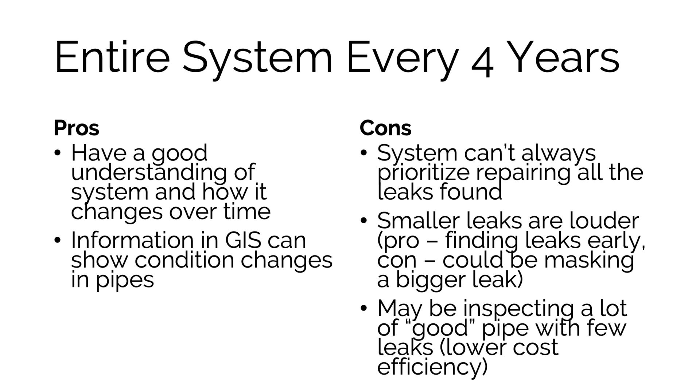But the whole point here is basically, if you're going to do something, do it right. Track the information, and to the extent that you can, use that information to really direct your efforts as you go forward.

Nothing in your system is static. Leak patterns are going to develop. Leaks are going to move around the system as you fix and repair things. So you want to be keeping on top of that and make sure you're optimizing your leak strategy, optimizing your leak detection efforts, and then periodically reviewing whether the strategy you currently have in place actually still makes sense.

All right, I think we can turn things back over to Avery. All righty.